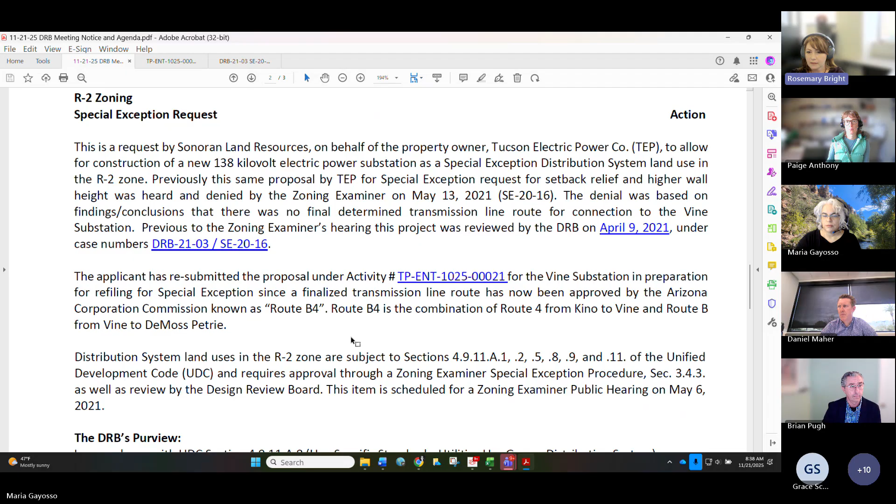Okay, great. Thank you very much. Does anyone on? Yeah, go ahead. Oh, I'm so sorry. And I forgot to mention the DRB's purview. It's in the agenda, but I'll go ahead and read it. In accordance with UDC section

4.9.11.A.8, the use specific standards for utility use group distribution system land use. It reads, any building housing such facility shall be in keeping with the character of the zone in which it is located. The Design Review Board shall review all applications and make recommendations to the zoning examiner. The DRB shall review architectural style, building elevations, materials on exterior facades, color schemes, new mechanical equipment locations, lighting of outdoor areas, window locations and types, screening, landscaping, vehicular use areas, and other contributing design features.

Great, thank you for that. That really helps. All right, does anyone on the Design Review Board have any questions before we ask the applicant to present? All right, we'll go ahead and move forward. And who will be presenting on behalf of TEP?

Good morning. My name is Brian Pugh. I'm the consulting planner for Tucson Electric Power from Sonoran Land Resources. Can I go ahead and share my screen? Please do. Thank you.

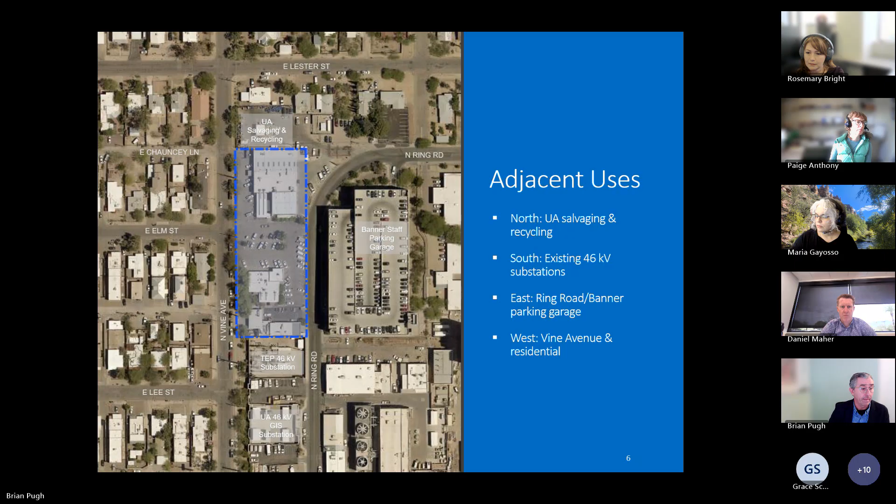The preliminary development plan, as Maria mentioned, was brought to the board in 2021, and this is the same presentation made then. Basically, the 1.6 acres will be enclosed by a 13.5 foot tall security wall with design features we'll be looking at, and it will be a 138 kV gas insulated substation.

This design is used in locations where land is limited, so all the equipment can be encased in a hermetically sealed vessel with insulating gas, meaning much less land use space is necessary for the substation to operate. Here we have residential uses to the west, the recycling facility to the north, Banner to the east, and the existing substations to the south.

The main feature for land use compatibility with the residential area to the west is the 20-foot landscape buffer, shown here from Vine Avenue with the right-of-way: 10 feet of right-of-way, then the 20-foot setback, then the wall, then the equipment for the substation. The proposed wall height is 13.5 feet, matching an existing design that U of A has at their GIS substation. We'll look at photos of that next.

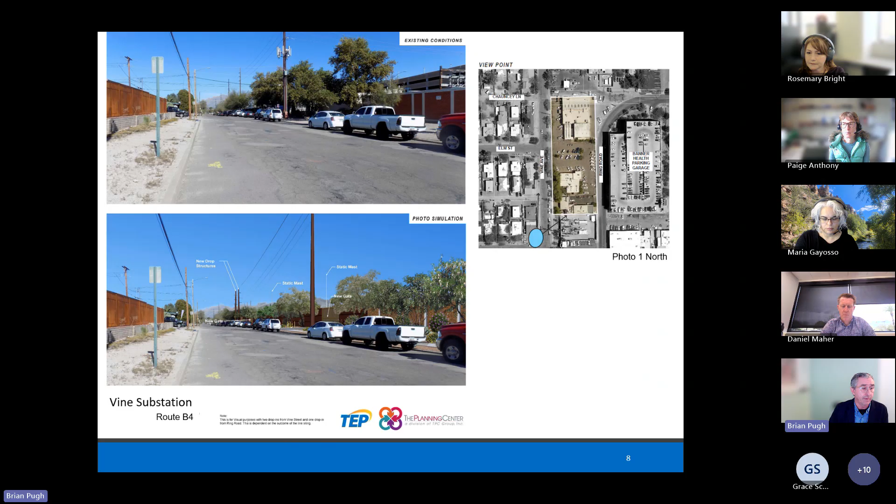In the future, that wall will remain, and you'll begin to see new equipment for the transmission line come in and drop in. The new wall will begin at the southern end and move forward all the way up to the top of the parcel to the north.

A better view from the north looking directly at the existing conditions of the former facilities buildings for the U of A, and what the proposal is for TEP's Vine substation, GIS substation. The decorative wall is the design we'll be looking at. In the background, you have the Banner parking facility, and then the proposed locations of the 138 kV transmission line, the drop into the structure into the substation.

In the back here, you see this canopy, which is a 20-foot high metal canopy that protects the GIS vessel and system, and also has a gantry crane underneath to remove the equipment for maintenance over the life of the project. That canopy will meet the height requirements of the R2 zoning district. And again, the landscape materials here are compatible with desert acclimated plants. We'll look at that plant palette going forward, and that will be the 20-foot setback.

The transmission structure will be located in the right-of-way, but this shows them kind of adjacent to it for the purposes of the photo simulation. But we'll look more at that in the plan view, where they'll actually be more closely located in the right-of-way versus adjacent in the 20-foot setback.

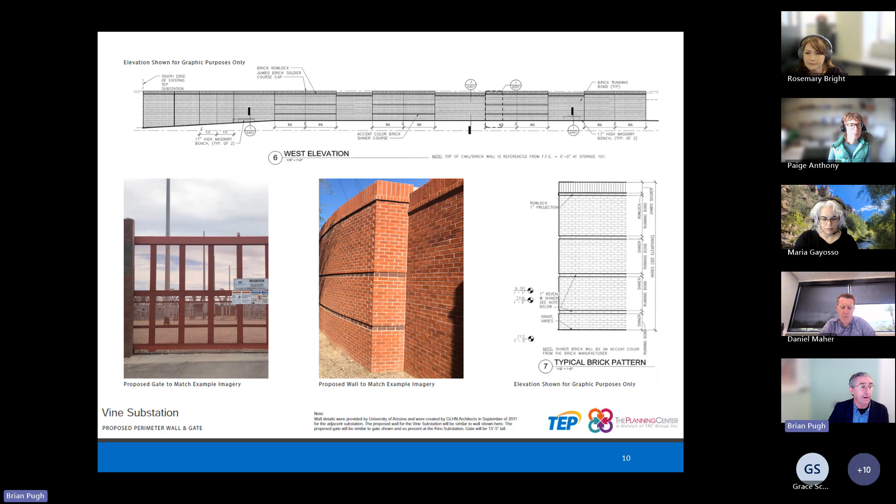Here is the existing wall and the design drawings that came from what was designed in 2011. It is 13.5 feet tall. The gates, two on Vine and one on Ring Road, have a metal screen with a certain opacity. If you're looking directly through the screen, you can see into it, so as security teams pass through, they can see there's basically nothing going on inside. As you move away from the direct position, it has a 70% opacity.

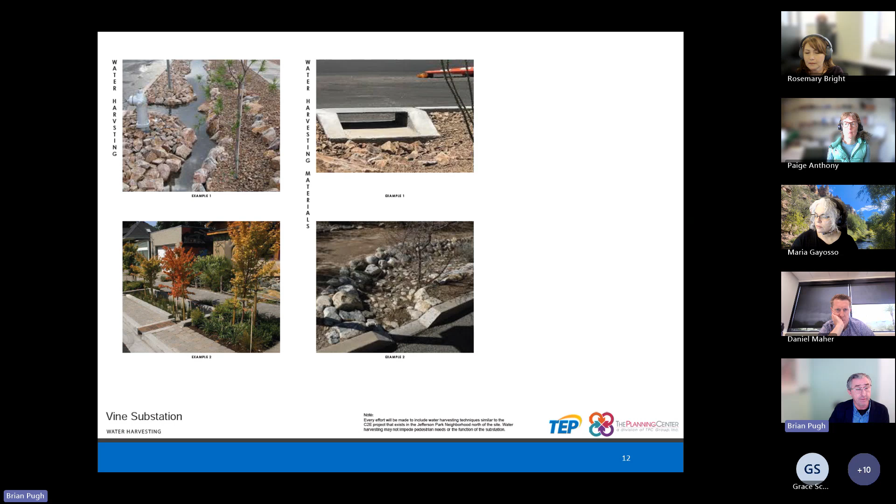Here's the presentation of the plant palette, the different structure of trees, shrubs, ground cover, and accent plants, examples of that. And then examples of the water harvesting features with curb cuts and basins, the micro basins all along the whole 20 feet. The plants will be irrigated to establishment, and once established, the water harvesting features will then be their main irrigation. Those are the main features.

So we're ready to take any questions that board members may have for us. Great, thank you very much. I think you answered a lot of the questions I was thinking of, but I'd like to open it up to the design review board and hear what questions everyone has.

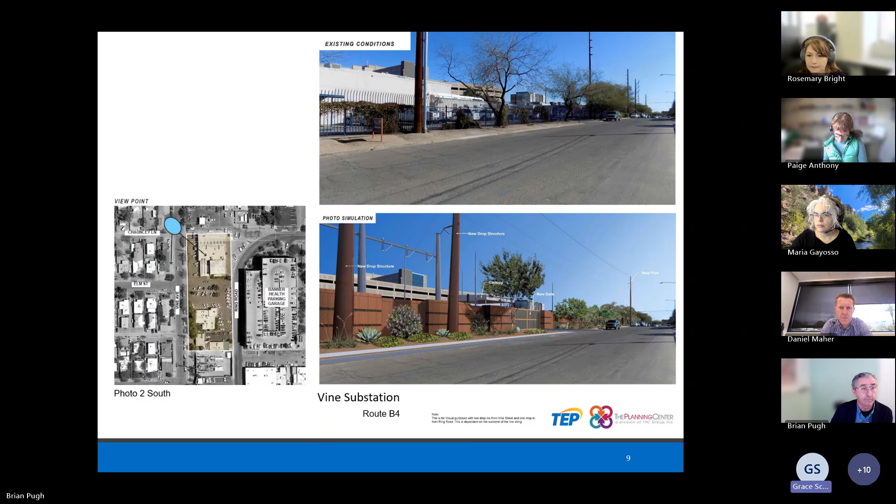Okay, yeah, I think that the image is a little deceiving. It seems like the wall is in place with that fence, but what you're telling us is the wall is actually 20 feet farther back than the fence, right?

That's correct. So basically, here's the curb, 10 feet of right of way. Existing, those two, the structure you saw is sitting right here. And then the 20-foot setback, then the wall. As you see down, I have other images that show the right of way if board members want to look at that. But the walls will line up. Here's the existing wall that we looked at in the photo sim of the substation that's there right now.

So those walls will line up. We can't see your cursor for some reason, so maybe you could help us understand verbally. There we go, now I can see that. So there's the wall there, and so those will line up. Those are also in the same alignment as the U of A's GIS substation going farther, so there'll be a direct alignment all the way down.

What is the existing right of way? It's 10 feet. So ultimately it's 30 more or less from the curb.

I had a question about the existing trees. Is there a native plant protection plan for this site? When we move forward in the development plan, yes, they'll go through the inventory that's there. Fortunately, this has all been inventoried. It's all part of the U of A's Arboretum. We went out and field checked the Arboretum's inventory and they are there.

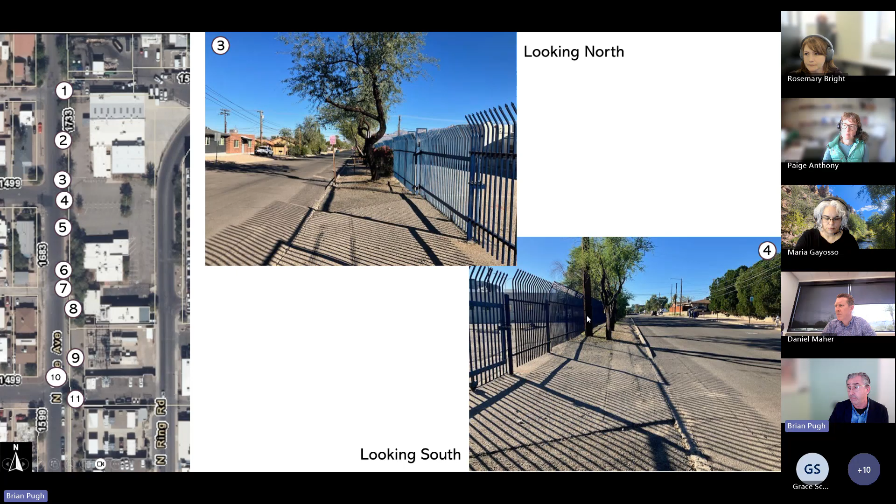Position 5, looking north. Existing structure. Here's another one, I believe it's one of the Chileans. It's in the Arboretum's inventory. Then 6, looking north, basically some shrubs, and you start to see the sissoos along that are in the parcel.

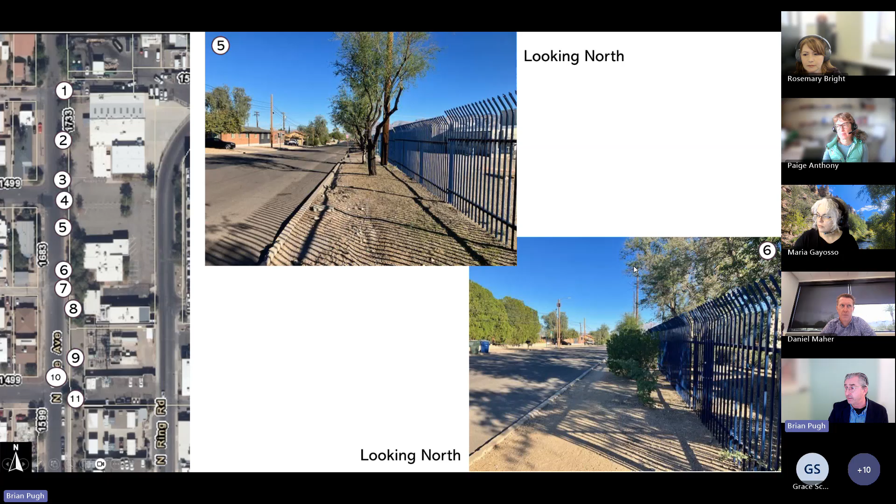7 is basically now we're at the southern end of the fence. Here's another structure. From 8, now the fence is gone, so you have the 10 feet of right of way and the 20 feet of setback. This will be the alignment of the building, the tan building will be the wall, so that alignment will go straight down Vine.

8 again, looking north, this is basically looking into the parcel where you have all the sissoos. Then 9, right next to the existing 46, on the curve here, looking north, you can see the actual structure in the right of way, edge of right of way, and then this will be the setback.

Finally here we've come back into 10, which are now in Vine, looking at the existing 46 kV, this will be the new 138 wall. Then in 11, this shows the existing treatment of the 13.5-foot wall around UA's GIS, and then the step down to the 11-foot existing TEP substation.

Yeah. Thank you. Right, I think that was helpful.

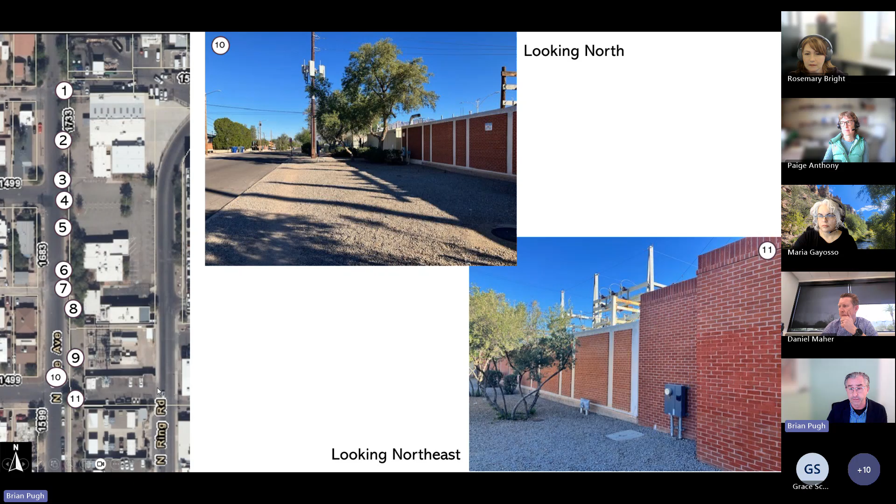And then the new structures that you will be placing, will they be in line with the existing, or will they be justified more toward the wall? Most likely they're going to be in the same position you see here in 9. That's in the right of way.

What other questions do board members have? So it appears that there's a small discrepancy between the diagrammatic site plan and the elevations that were proposed.

I have a question. I know this isn't being presented, but what is the intent of the screen wall that wraps to the east side, on the banner side? Is it to maintain that same relief and undulating nature of the wall, or will it be a flat facade?

Let me clarify your question. Are you talking about the setback on the existing or the future? On the future, what you guys are proposing. So on your site plan, you use a straight line as the boundary, but on your elevations there's clearly a relief pattern matching the existing, further to the south. My question is whether the intent is to keep that same patterning in the entire enclosure along Ring Road, or are you proposing a flat wall?

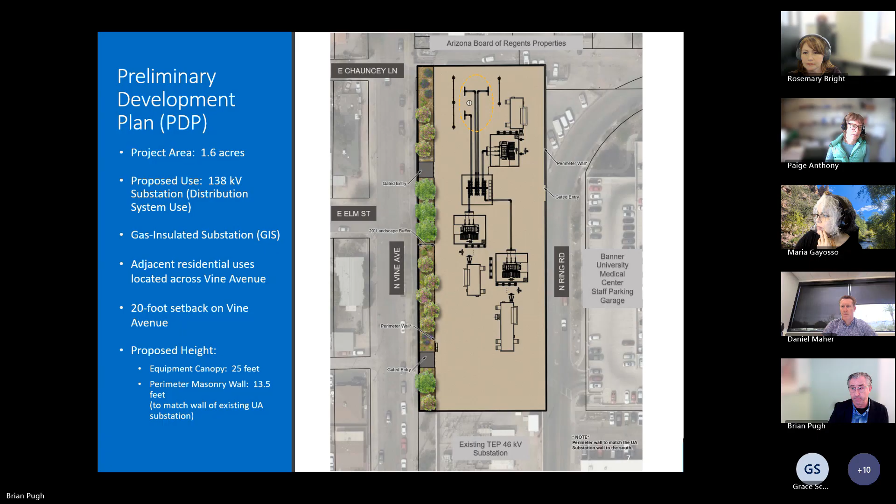Would it be helpful to look at our purview to see if we have any more questions? Sure, that's a good idea. So architectural style, building elevations, materials, colors, mechanical equipment locations, lighting, windows which don't pertain here, screening, landscape, vehicular use areas, and other features.

Looking at the purview, can we go back to the canopy? Is there only one canopy, and can you describe a little more the construction of that? Sure, there is one canopy, and it basically will cover the main equipment.

It's 25 feet tall. There's an existing structure at the Tucson GIS substation, just north of downtown. That structure is, I guess you'd say, battleship gray. So in the renderings, it shows it at that color, which is obviously the protective treatment on the actual steel. So it meets the height requirement.

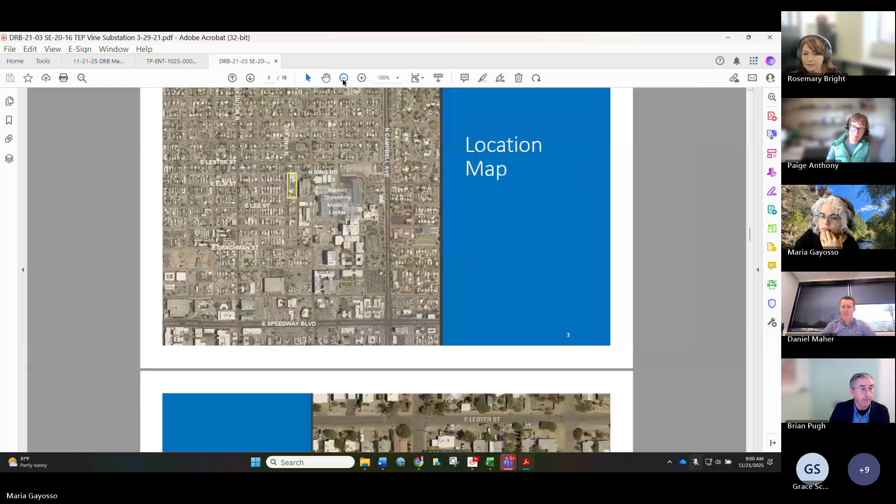And underneath it is actually a functioning component of the facility. It has a gantry crane that you can basically lift up equipment and pull it in and out of position.

So this canopy will be 25 feet in the air? Correct. So it's not quite represented correctly here in the rendering? From that perspective, from where it is, it's correct. It just looks shorter. It does.

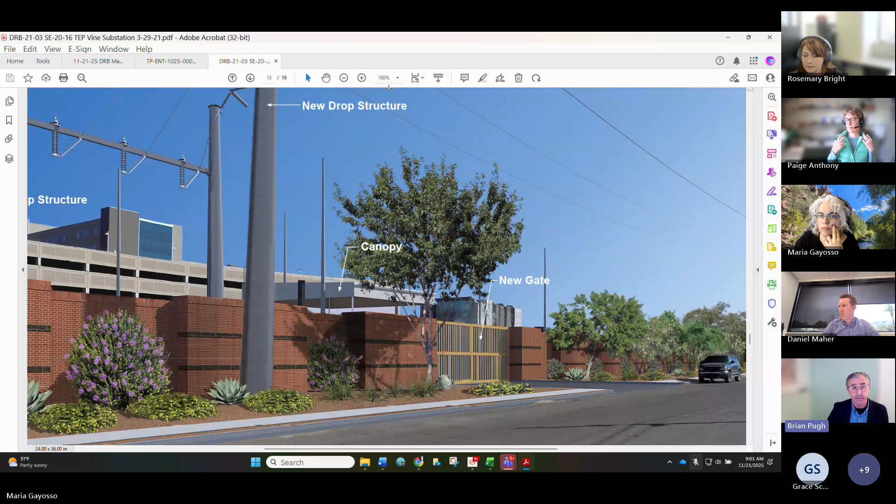And how far away from the wall is that canopy? Looking at the site plan view, that's 20 feet... it looks like it's actually over 35 feet away from the wall. Enough room for equipment to move safely, a safe distance away from energized equipment inside the substation during operation.

And is that the tallest element inside of the wall? Of the equipment for the substation, the height of the transformers is about 14.5 feet.

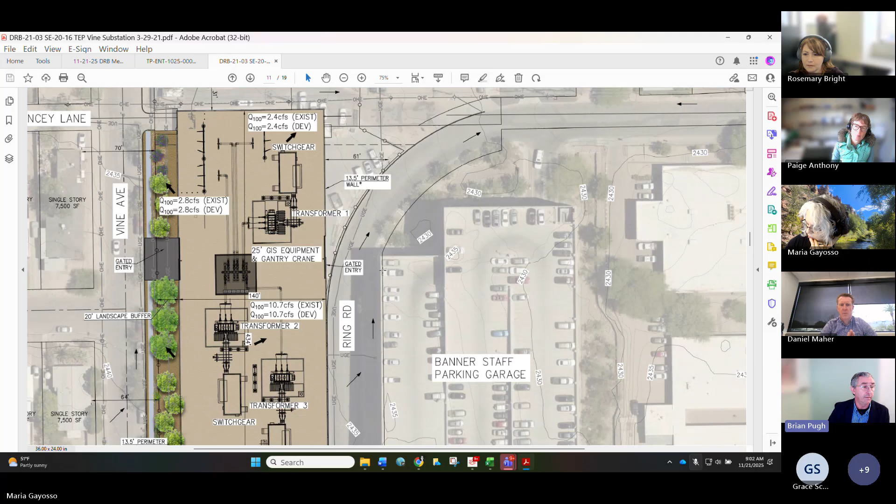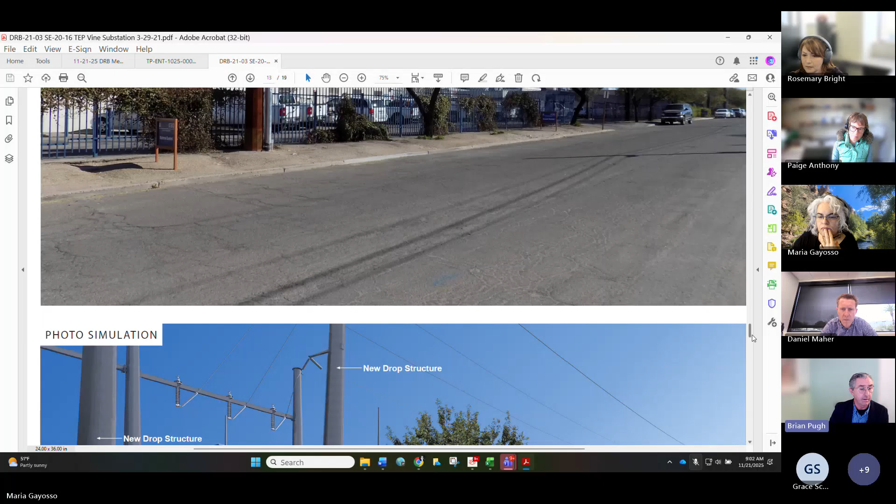Then inside the substation, if you look at one of the photo simulations, you see the H-frame, which is where the drop-in structures from the transmission line come in. And if you go to the following one from the north, that has a better view of the equipment handling the conductor, a little farther down. That's the drop-in structure, and the H-frame for it to drop the line into the transformers.

The 55-foot high structures you see around the transformers and the GIS equipment are lightning masts, a structure to protect the equipment from lightning. Those are generally 55 feet tall and have that brushed galvanized finish, similar to any electric structure in the right of way in Tucson, so there's no glare.

Most of the drop structures I've seen around town are finished with a rusted color that would match this brick wall. Are you planning on finishing these with that similar color?

I'll ask one quick question of one of our members from TEP, Clark Briner. The transmission line is approved by the ACC, but TEP generally does not like to use corten steel for equipment inside the substation, as it drops rust on the equipment below, which can damage it. But the transmission structures, I believe, are going to be that corten steel rusted brown. Clark, is that transmission line color going to finish as corten steel?

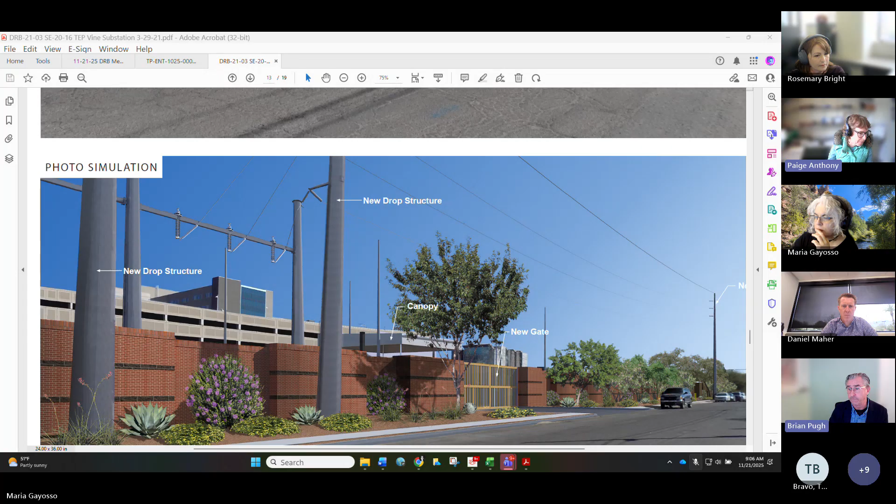I was wondering about the rainwater harvesting, because I see flow arrows and some of the water is going to the northwest and some to the northeast. This might be out of our purview, but I'm assuming this has to have a commercial rainwater harvesting plan, or no?

Yes, and generally other substations inside the city of Tucson that have been designed—Keno, Patriot, Cottonwood—have penetrations through the wall at the base, so flows coming off inside the substation can feed into those basins. The water going to the east would be handled in the drainage system inside, over to the U of A water harvesting basins down Vine.

I'm assuming it was graded so that, if not, it can easily be graded so that all flow goes into Vine.

I would try to max out the capacity of those basins on the west side, especially if the intent is to ultimately turn off irrigation. I know Little Leaf Ash does like water, as does Desert Willow, although they are drought resistant, but I like the plant palette.

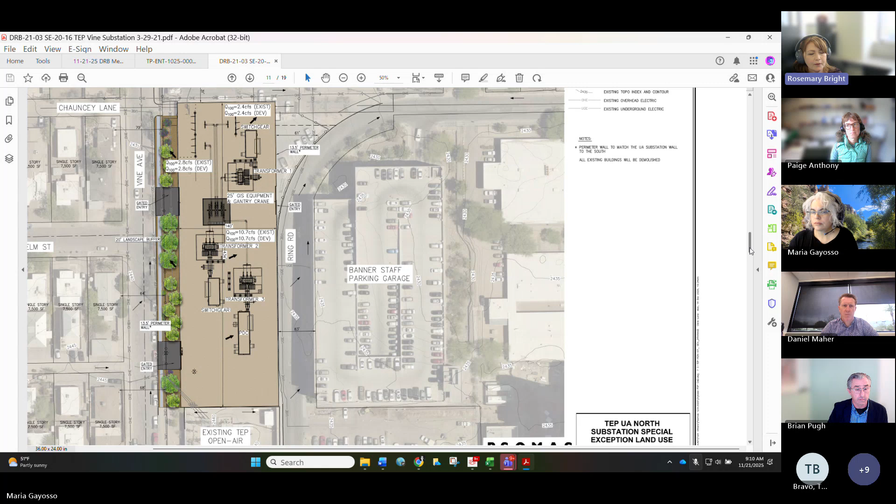All right, any other questions on heights, materials, colors, landscape, lighting, anything in our purview? Nothing? I don't have any more questions. Does anyone feel comfortable moving forward with the motion? How are we feeling about that?

I have two notes that I think we would want to include, if not as conditions, then as suggestions. One is to ensure the Cor-Ten steel finish of those vertical components, those drop-ins, and also to suggest that the rainwater harvesting be sloped to the west in order to give the most irrigation to those plants. Any others that I missed?

I would just ask for clarity on the question I asked related to the stepping of the wall around the perimeter. I know that ring is private, but I think that gives a better overall understanding of the project for stakeholders in the future. Okay, that's a good catch.

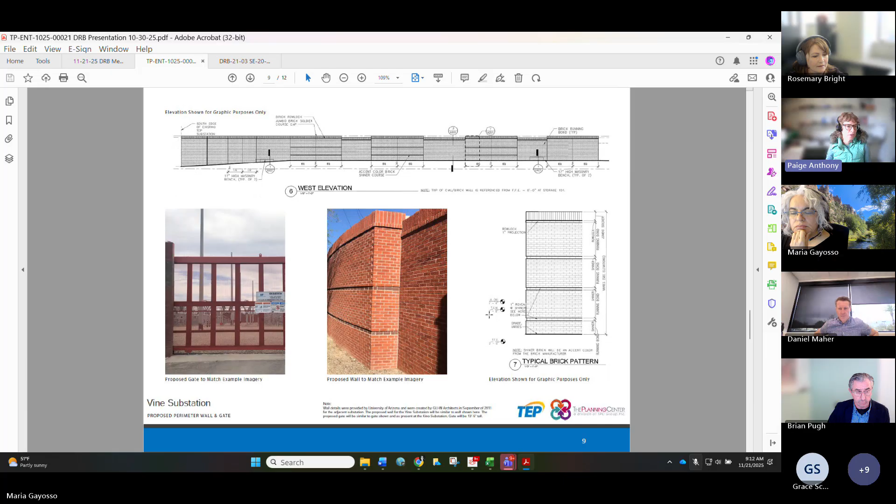Looking at the existing wall, yeah, also on the existing wall if you look down there, it's definitely deeper—a couple feet. It looks like some are shallow and some are deeper, so it does vary.

I think from the perspective of having such a long wall, the variation is a nice design feature, so I didn't mean to say we need to lock it in at a certain depth. I just wanted to get an understanding of what we're proposing. Sure.

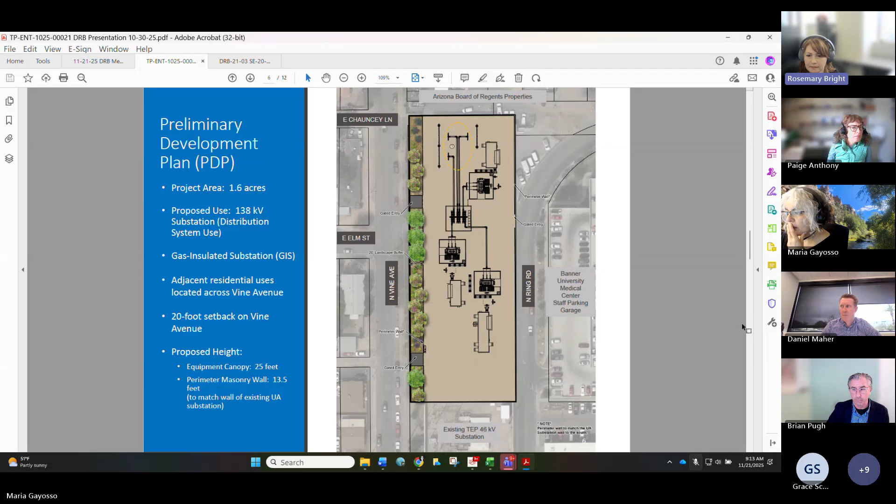Okay, well, if no one else wants to, I could take a stab at the motion and list these three suggestions that we have. So the design review board has reviewed the applicant's project for compliance with special exception use-specific standards for utilities distribution system and finds the project in compliance with the use-specific standards set forth in UDC section 4.9.11.A.8. And we have the following suggestions.

We would like to ensure that the drop structures are finished with the Cor-Ten finish to best match the brick wall that's being proposed. We would like to ask that the rainwater harvesting system be sloped toward the west to serve the landscaping that will be provided. And we would like to confirm that the east wall will also be stepped to provide some visual relief from the very long wall.

I'll second that motion. Great, thanks. All right, all in favor? Aye. Any opposed? All right, the motion passes.

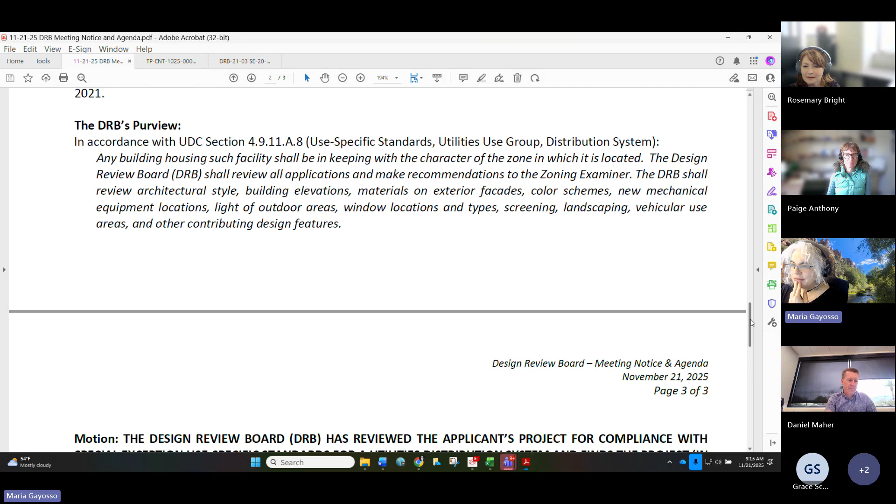So I don't know if you guys want to continue the election for chair and vice chair again until the next meeting. I really think we should continue it, but maybe we could do it at the beginning of the meeting next time.

So do I get a motion? Sure, I move that we continue the election until the next DRB meeting. Any second? I second. All in favor? Aye. Any opposed?

Kick the can again. Do we want to try and get everybody for that election item?

I think that would be best, but we probably won't get every single person. Maybe we should just make an announcement that everyone who's interested in potentially being chair or vice chair, or has a preference on who it should be and wants to vote, should be at the December meeting.

Yeah, I think it would be good. I just feel like we should have this election sooner, maybe before the end of the year. So it only gives us one meeting, or is there potentially another two meetings?